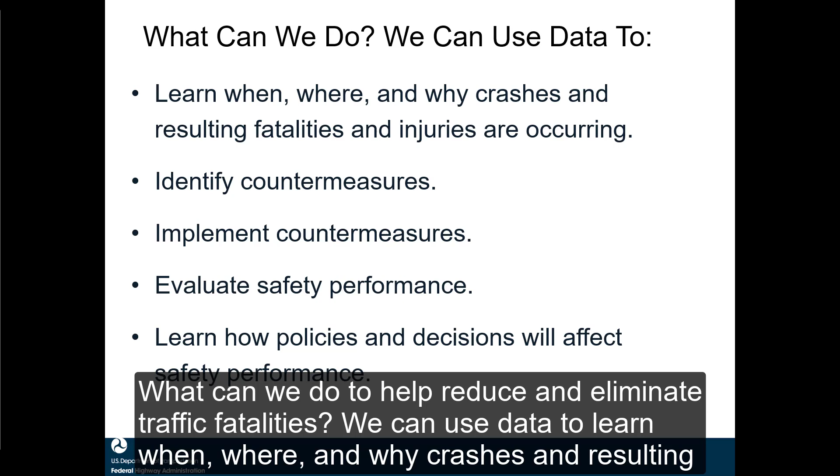What can we do to help reduce and eliminate traffic fatalities? We can use data to learn when, where, and why crashes and resulting fatalities and injuries are occurring, identify countermeasures, implement countermeasures, evaluate safety performance of treatments and roadways, and learn how policies and decisions will affect safety performance.

Data-driven safety analysis, or DDSA, is a method of analysis that uses tools to analyze crash and roadway data to predict the safety impacts of highway projects, allows agencies to target investments with more confidence and reduce severe crashes on the roadways. There are two approaches to DDSA: predictive analysis and systemic analysis.

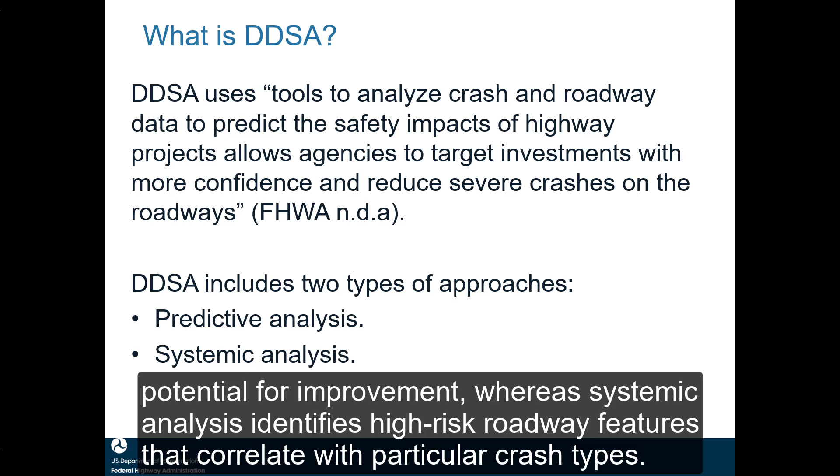Predictive analysis identifies sites with the greatest potential for improvement, whereas systemic analysis identifies high-risk roadway features that correlate with particular crash types. I'm now going to go through an example of using DDSA for a roadway project.

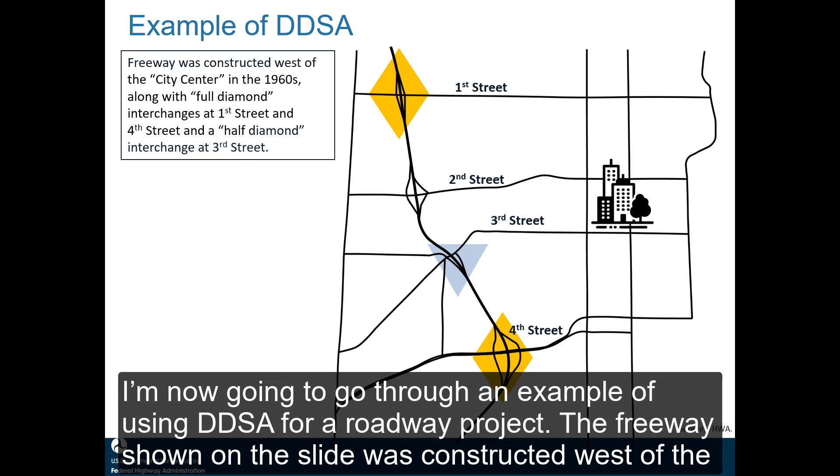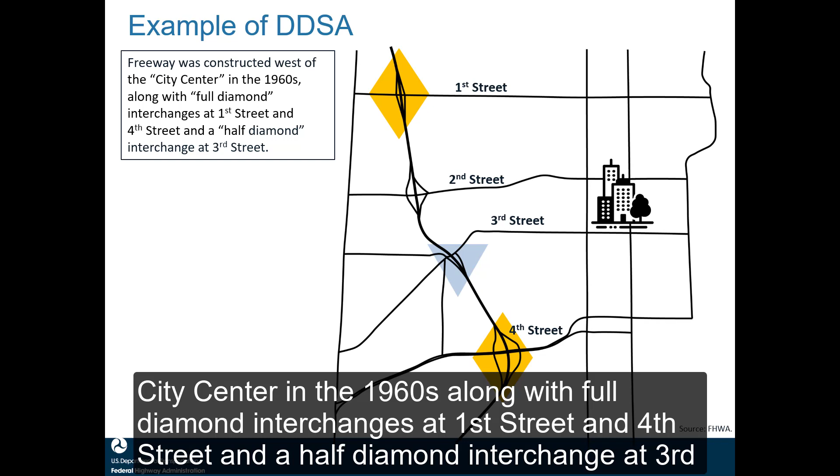The freeway shown on the slide was constructed west of the city center in the 1960s, along with full diamond interchanges at 1st Street and 4th Street, and a half diamond interchange at 3rd Street. Later, in 1977, an additional full diamond interchange was constructed at 2nd Street.

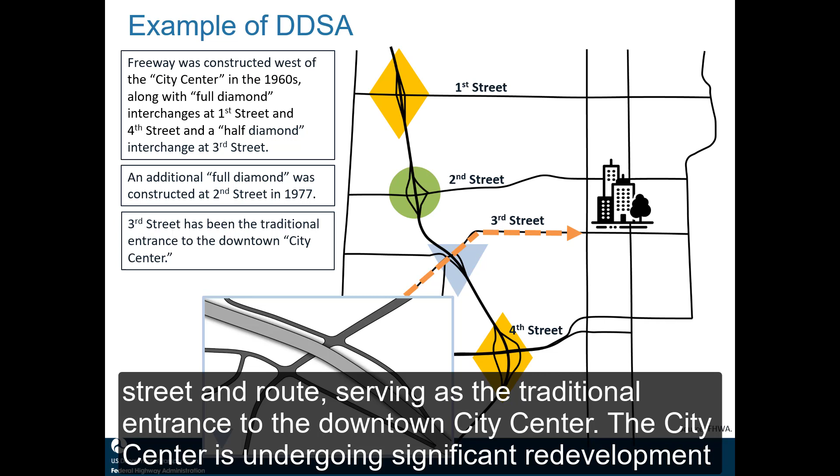3rd Street has been an important street and route serving as the traditional entrance to the downtown city center. The city center is undergoing significant redevelopment efforts.

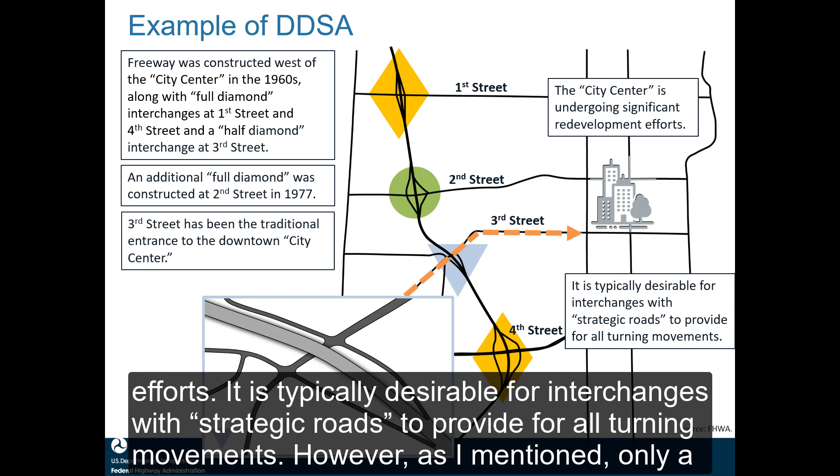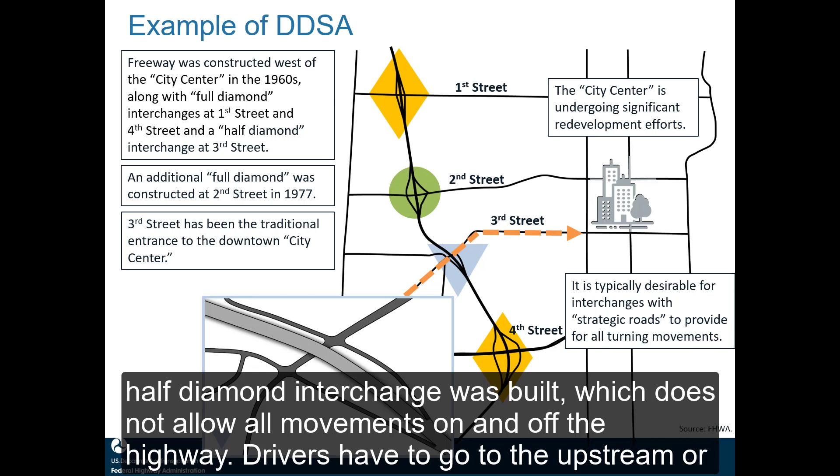It is typically desirable for interchanges with strategic roads to provide for all turning movements. However, as I mentioned, only a half diamond interchange was built, which does not allow all movements on and off the highway. Drivers have to go to the upstream or downstream interchange to make certain movements.

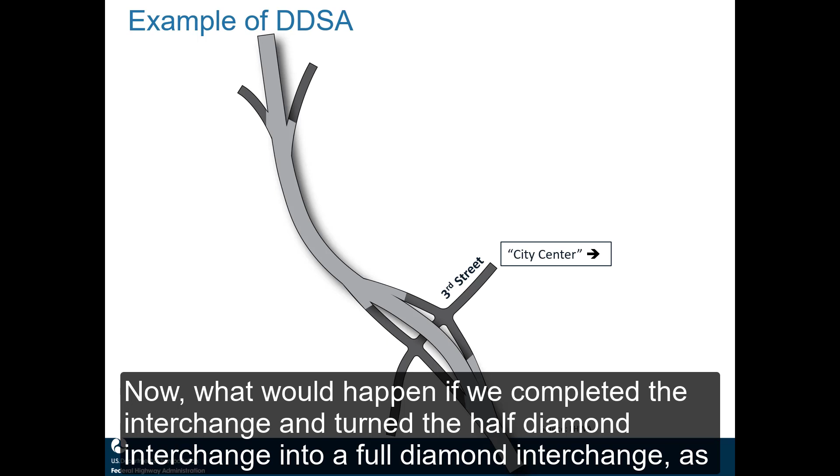Now, what would happen if we completed the interchange and turned the half diamond interchange into a full diamond interchange, as shown on the screen? What are the potential safety issues we need to think about? One safety issue we need to consider is that ramp spacing gets tighter, which could result in more weaving movements.

Before I proceed any further, I want to define a couple of key terms I've used while discussing these examples. The first is interchange spacing, illustrated in the top drawing. This is usually defined from the center line of a cross street with an interchange to the center line of an adjacent cross street with an interchange.

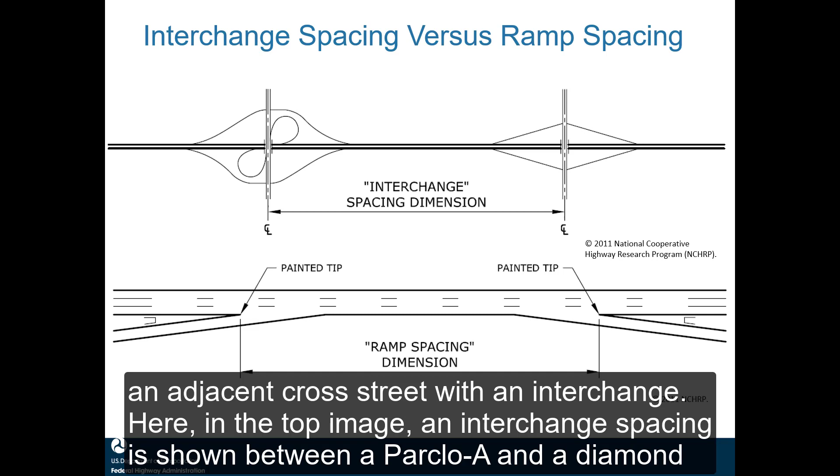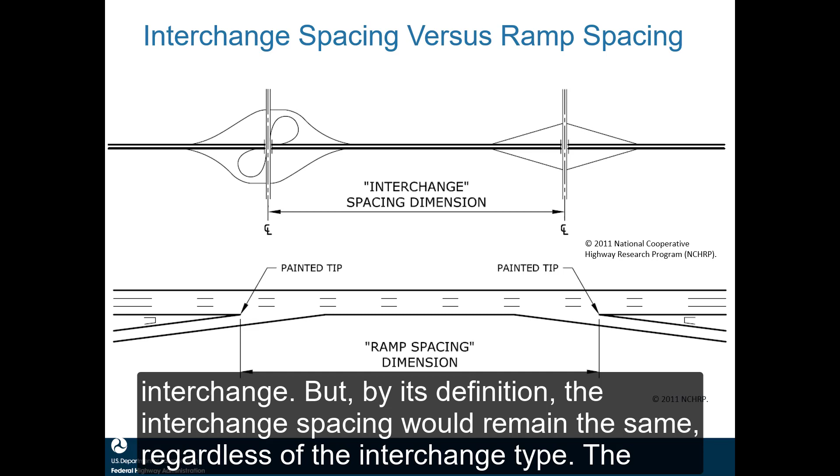Here, in the top image, an interchange spacing is shown between a parclo A and a diamond interchange, but by its definition, the interchange spacing would remain the same regardless of the interchange type. The dimension in the bottom image represents ramp spacing, which I will define during this presentation as the length between the painted tips of two adjacent ramps.

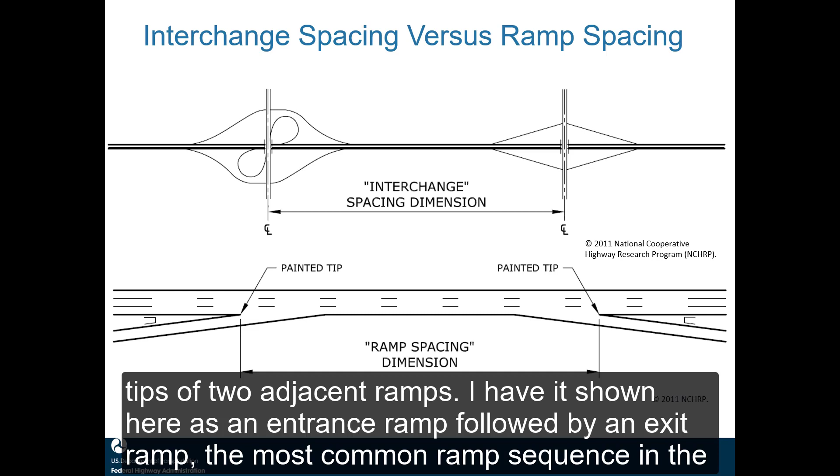I have it shown here as an entrance ramp followed by an exit ramp, the most common ramp sequence in the US. This could also be consecutive entrance ramps or consecutive exit ramps.

This definition has varied. The Green Book, the most widely referenced geometric design policy in the US, has defined ramp spacing as between like points, which could vary quite substantially depending on the like points we choose. The Highway Capacity Manual has offered some different definitions as well.

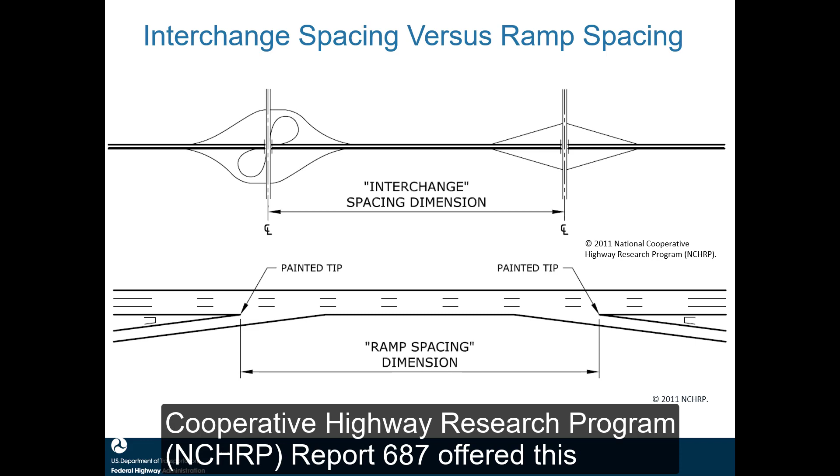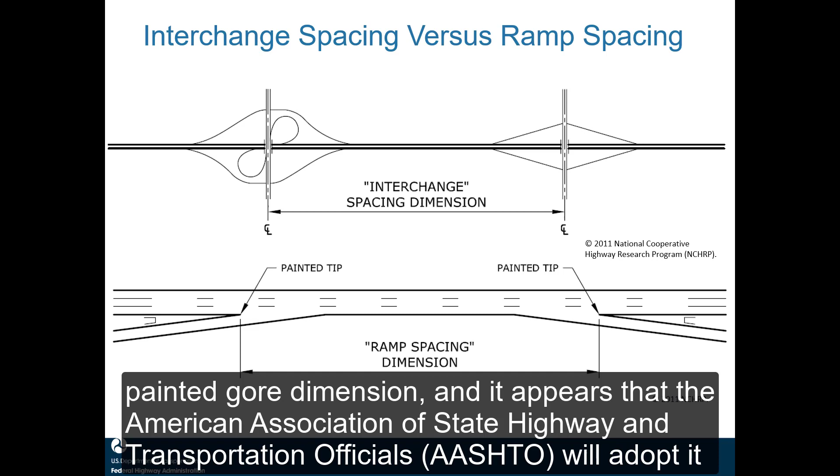National Cooperative Highway Research Program (NCHRP) Report 687 offered this painted gore dimension, and it appears that the American Association of State Highway and Transportation Officials (AASHTO) will adopt it for future editions of its Green Book.

Ramp spacing seems to have more relevant meaning from an operational and safety standpoint, as one interchange spacing can correspond to a range of ramp spacing values, depending on the interchange type.

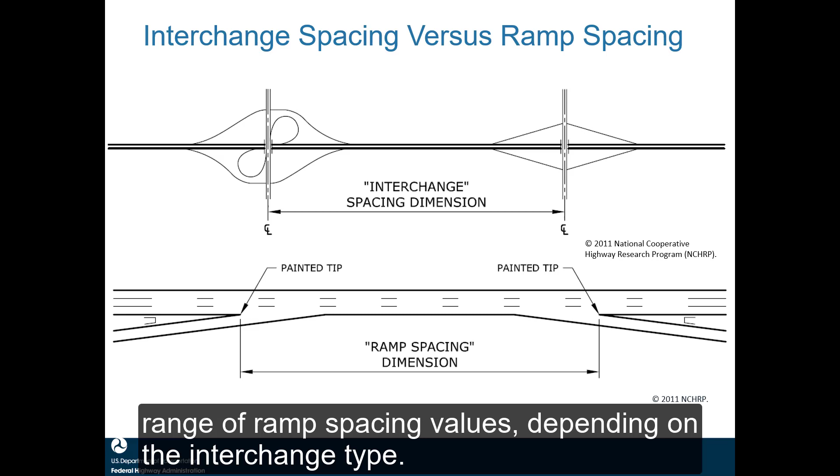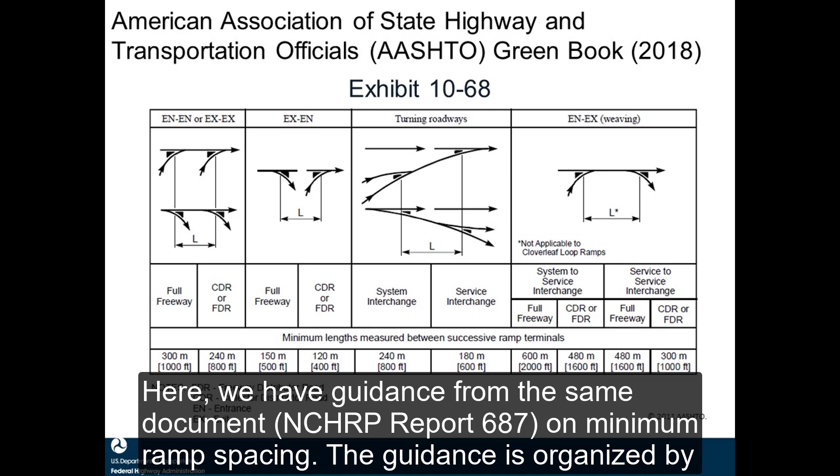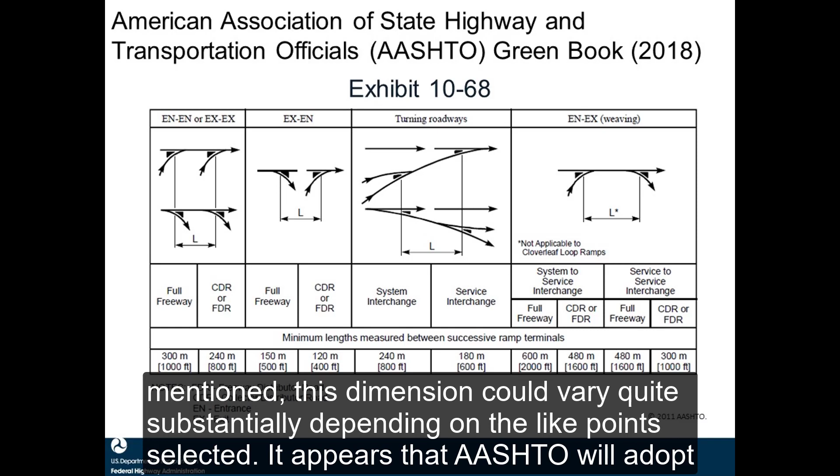These dimensions are shown here to be measured between what appears to be physical gores, but the Green Book suggests that any like points can be used. As I mentioned, this dimension could vary quite substantially depending on the like points selected.

It appears that AASHTO will adopt the painted gore to painted gore dimension that NCHRP Report 687 offered for future editions of its Green Book.

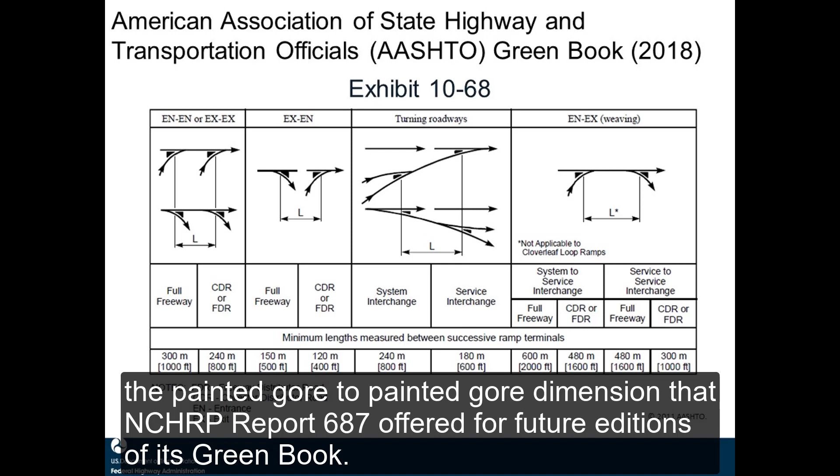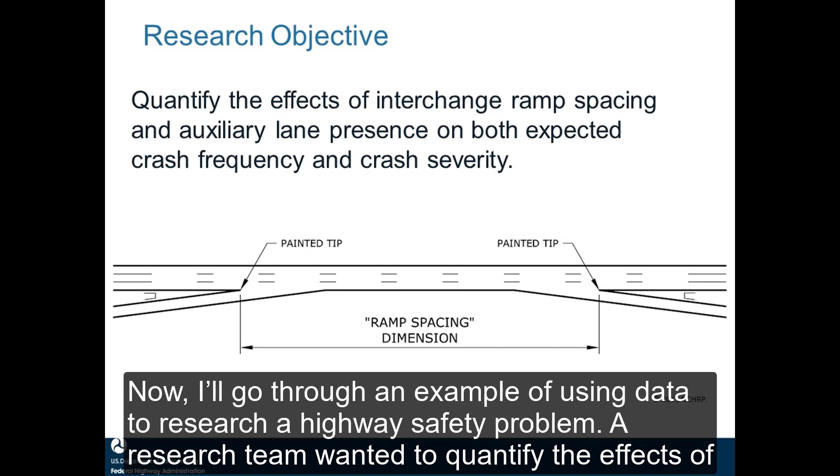Now I'll go through an example of using data to research a highway safety problem. A research team wanted to quantify the effects of interchange ramp spacing and auxiliary lane presence on both expected crash frequency and severity. Defining the segments was the first challenge.

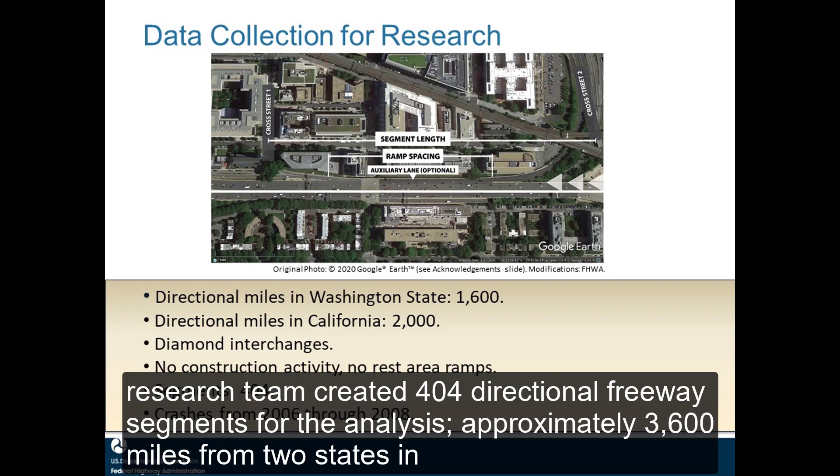Normally, segments are defined to be uniform in terms of their traffic and features. The research team created 404 directional freeway segments for the analysis, approximately 3,600 miles from 2 states in the U.S. These 2 states do not provide a lot of geographic dispersion across the U.S., but they are 2 states with data related to ramp volumes, an important component of the models.

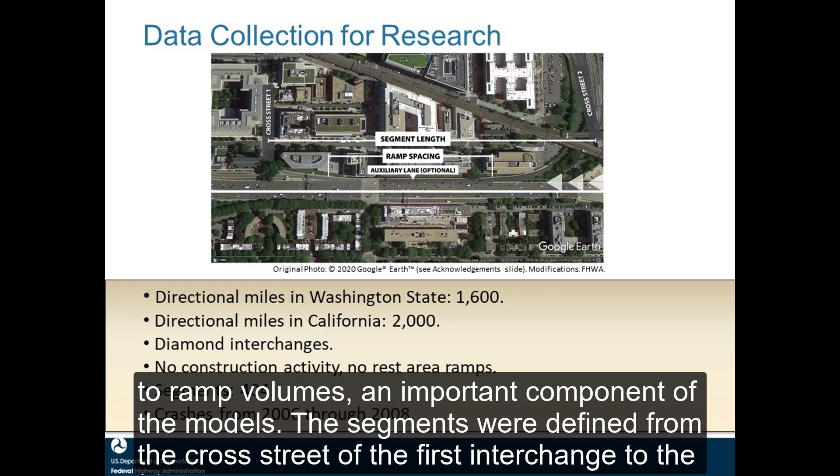The segments were defined from the cross street of the first interchange to the cross street of the next downstream interchange. Ramp spacing was defined from painted tip to painted tip.

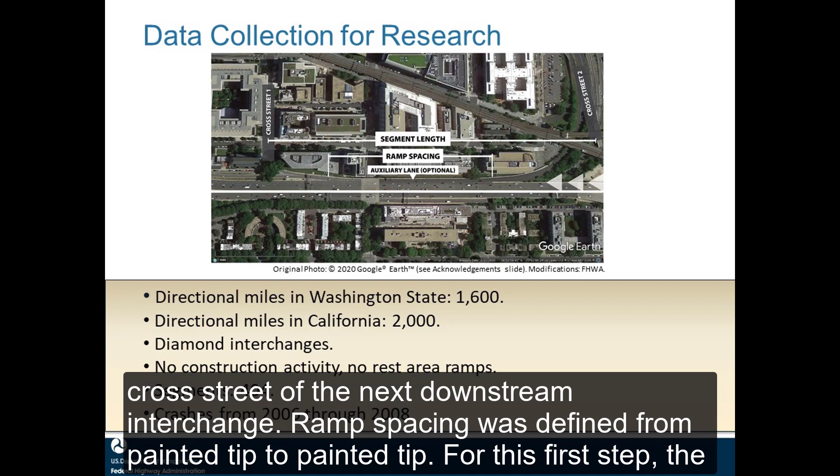For this first step, the research team focused only on segments with diamond interchanges at each end. As such, the research team always had an entrance ramp followed by an exit ramp.

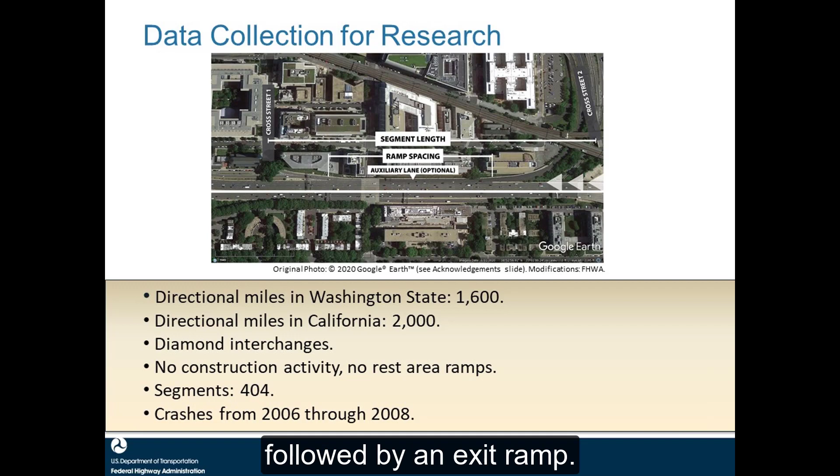Some segments had an auxiliary lane present, intended to improve safety and operations for shorter ramp spacing values. The safety effect of providing an auxiliary lane has not been quantified in the literature.

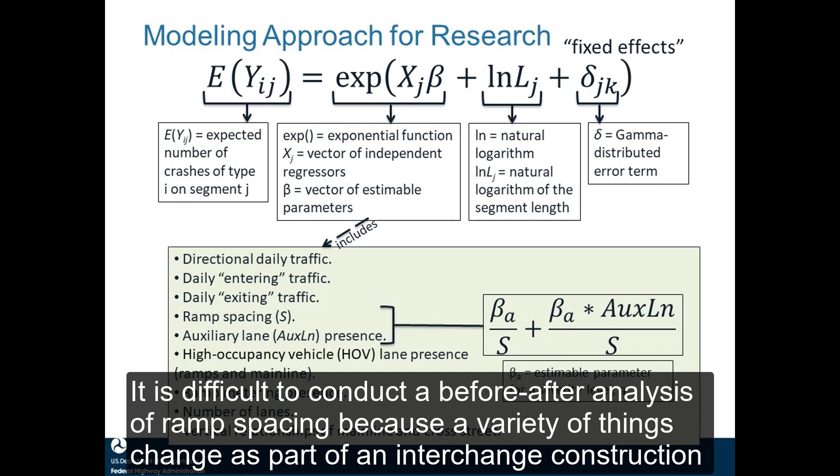The research team used 3 years of crash data to estimate the models. It is difficult to conduct a before-after analysis of ramp spacing because a variety of things change as a part of an interchange construction or reconstruction project.

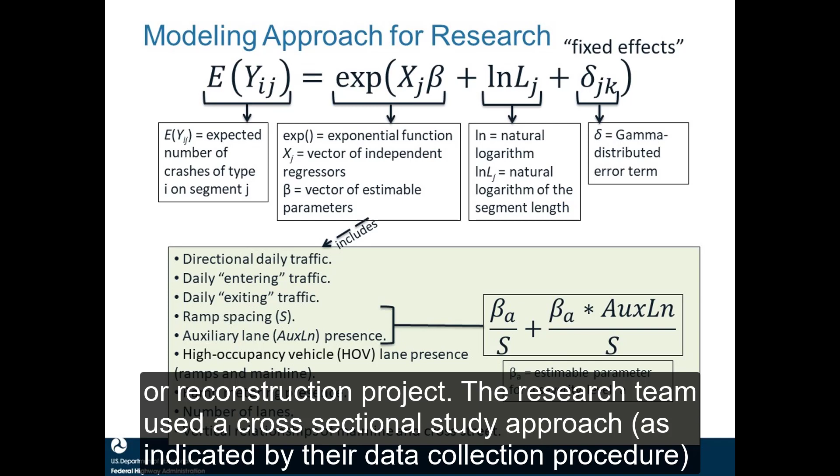The research team used a cross-sectional study approach, as indicated by their data collection procedure, and used negative binomial regression to quantify the relationship between ramp spacing and safety.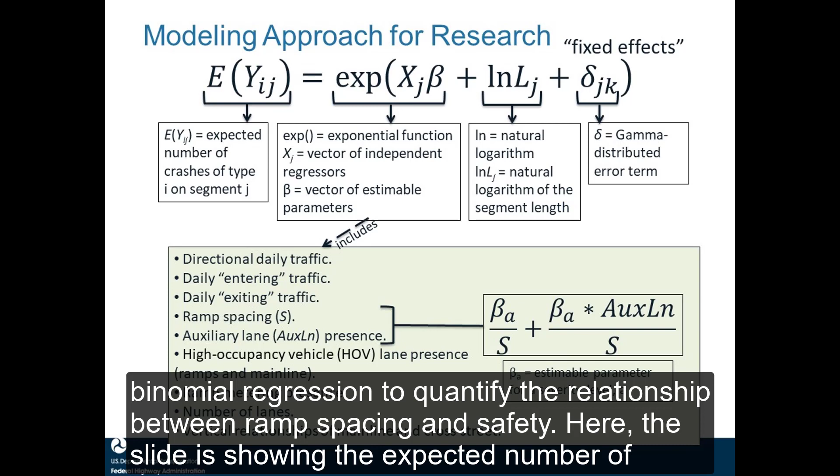Here, the slide is showing the expected number of crashes, possibly all crashes, or by type and severity, as a function of a number of traffic and geometric variables and the natural logarithm of segment length, which is included with the parameter set to 1, as shown here.

The covariates include directional traffic on the main line, entering and exiting traffic, ramp spacing, the presence of an auxiliary lane between entrance and exit ramps, the presence of ramp metering, presence of HOV lanes on the ramp and main line, the number of through lanes, and the vertical relationship between the cross street and freeway.

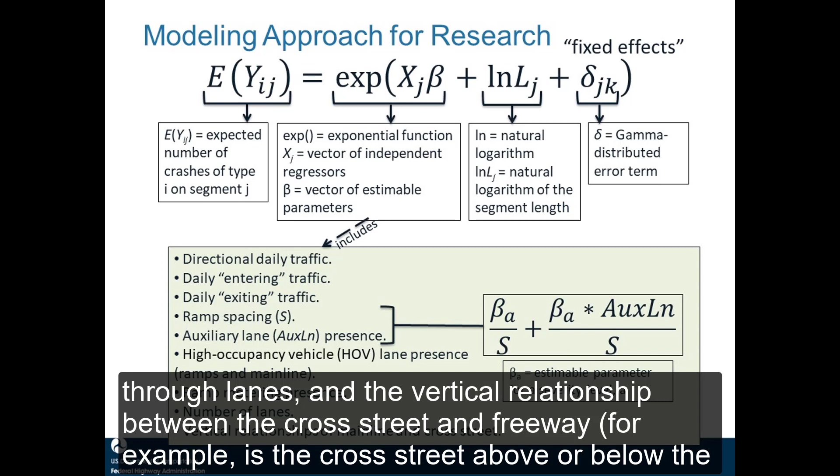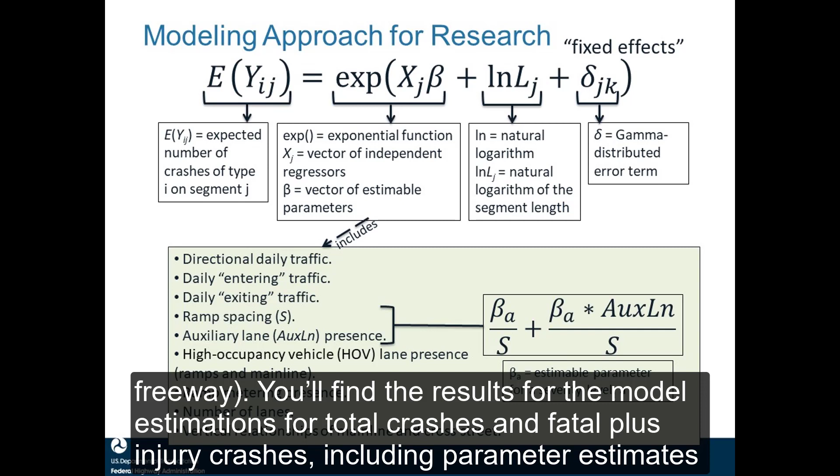For example, is the cross street above or below the freeway? You'll find the results for the model estimations for total crashes and fatal plus injury crashes, including parameter estimates and standard errors, in the research paper.

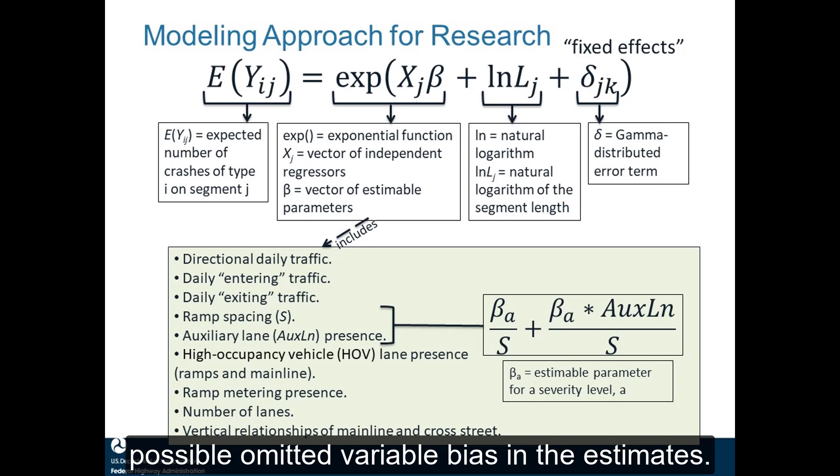The research team kept the model specifications general to try and minimize possible omitted variable bias in the estimates. Let me make one caveat here.

If you think back a few slides, we are defining our segments from cross street to cross street. This means that some of the features may change along the segment. The variables that are currently on the right-hand side of the models are those that do not change.

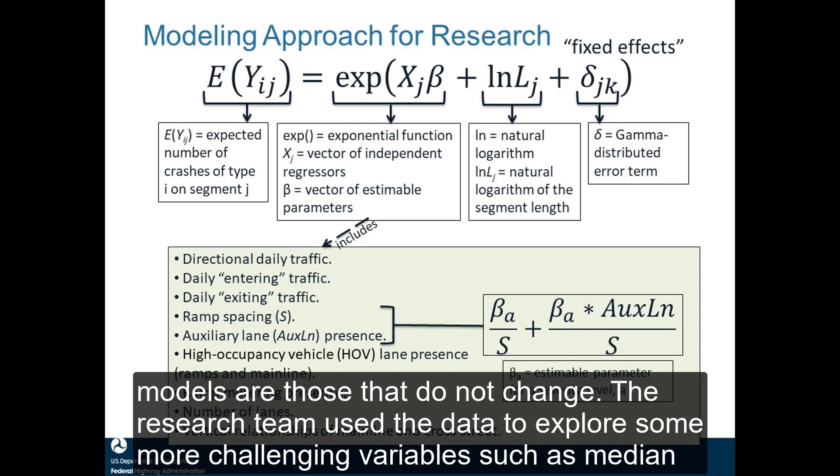The research team used the data to explore some more challenging variables such as median type and width, which may change one or more times throughout the segment. The research team tried a variable called percent of segment with median barrier.

It did not affect the ramp spacing parameter estimates, but once they added median characteristics to the model, they reasoned their level of confidence would increase another step.

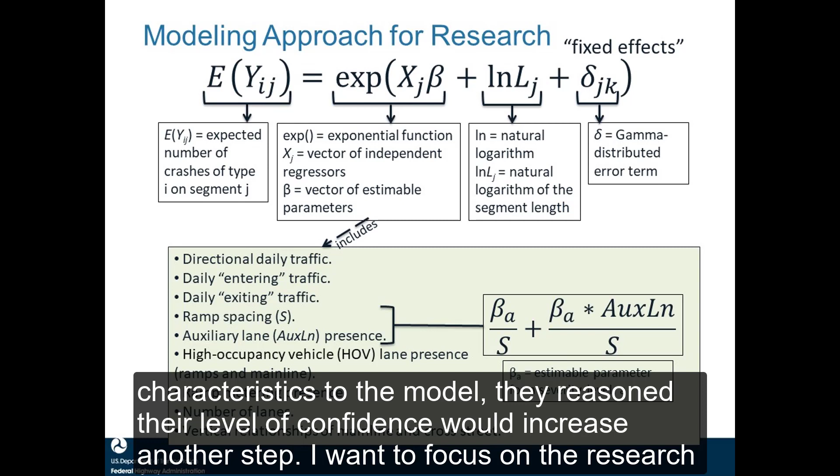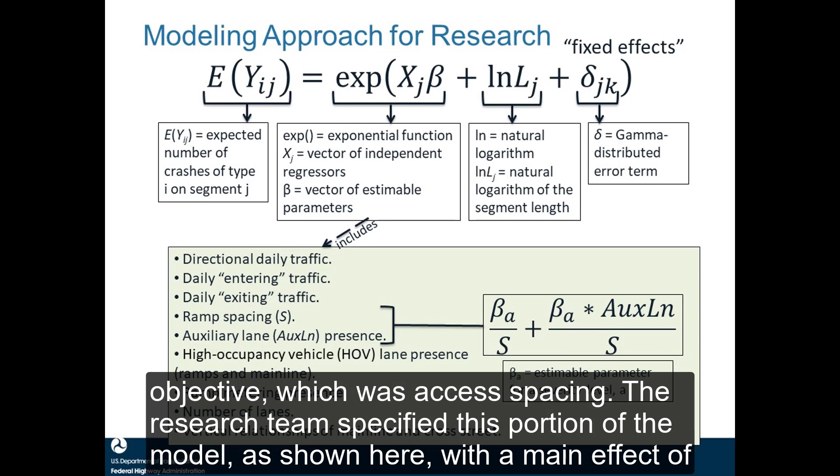I want to focus on the research objective, which was access spacing. The research team specified this portion of the model, as shown here, with a main effect of spacing, then an interaction effect of auxiliary lane presence with spacing.

I'll try to present these specific results in the form of crash modification factors. This is the ratio of expected crash frequencies under two different conditions. Oftentimes, condition A is referred to as the base condition, and condition B is some deviation from the base condition.

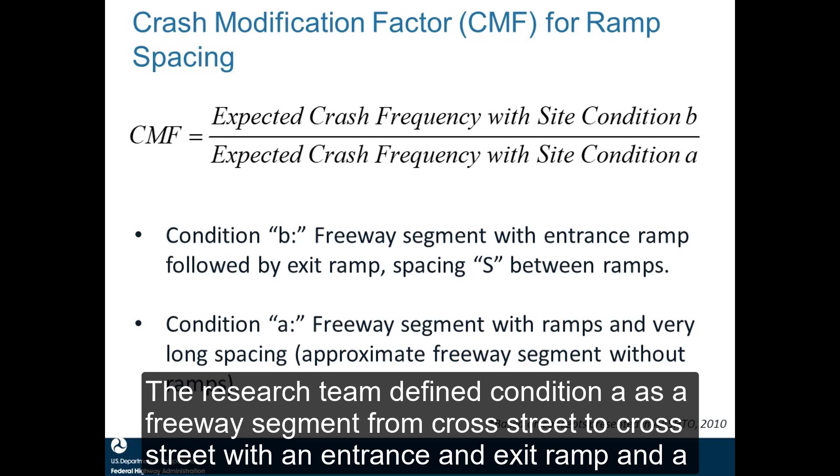The research team defined condition A as a freeway segment from cross street to cross street with an entrance and exit ramp and a very long spacing. Essentially, the CMF will approach 1 as the spacing approaches infinity. You can think of the base condition as a typical freeway segment, but the CMF never quite hits 1 because we always have the entrance and exit ramp location, where crashes tend to be a little higher than if there were no ramps. Here are the results for total crashes.

The parameter estimates for the rest of the variables are found in the paper, but with limited time, I wanted to focus on ramp spacing. We can now compare any two spacing values from a safety standpoint.

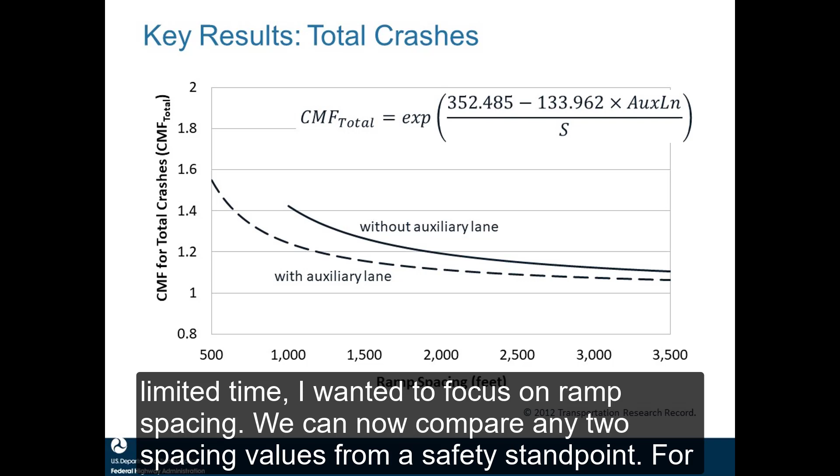For example, we have a CMF of approximately 1.1 at a spacing of 3,000 feet and no auxiliary lane, and a CMF of approximately 1.3 at a spacing of 1,500 feet and no auxiliary lane. So, we expect 1.3 divided by 1.1 equals 1.12, or 12% more crashes with a spacing of 1,500 feet compared to a spacing of 3,000 feet.

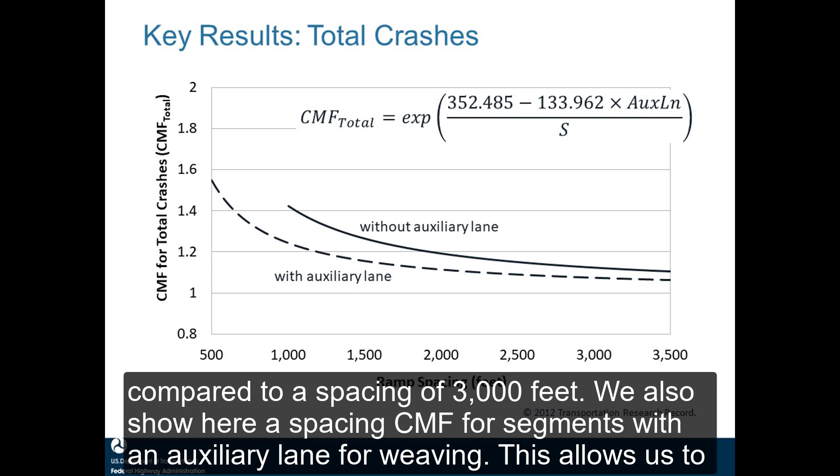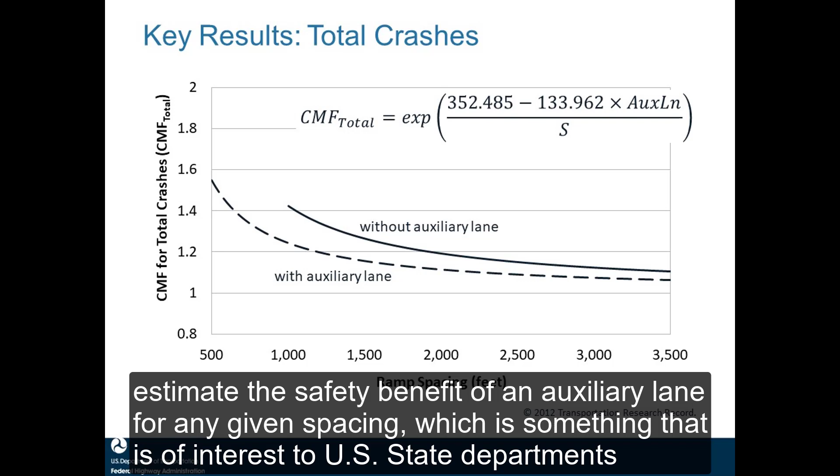We also show here a spacing CMF for segments with an auxiliary lane for weaving. This allows us to estimate the safety benefit of an auxiliary lane for any given spacing, which is something that is of interest to U.S. State Departments of Transportation, DOTs.

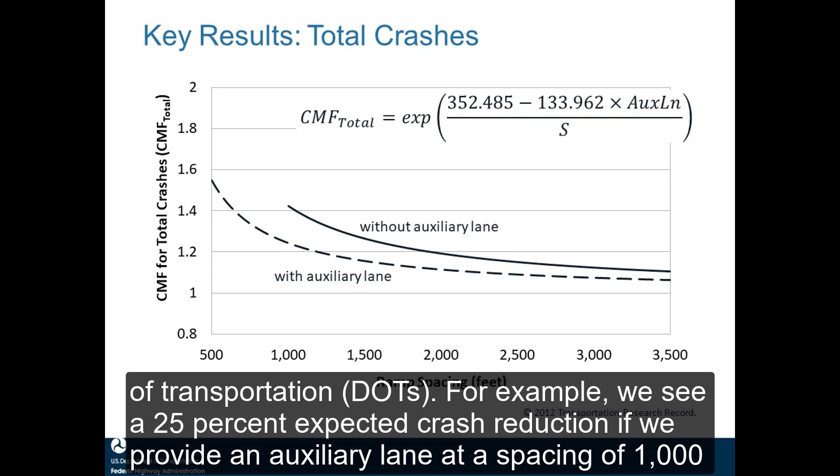For example, we see a 25% expected crash reduction if we provide an auxiliary lane at a spacing of 1,000 feet. This safety benefit diminishes as the spacing gets longer, as one would expect. For example, we see an expected 9% reduction at a spacing of 2,500 feet.

I'll also quickly show the results for fatal plus injury crashes. The trends are similar; however, the sensitivity is a little less than for total crashes. In other words, the proportion of total crashes resulting in a fatality or injury is decreasing as spacing decreases.

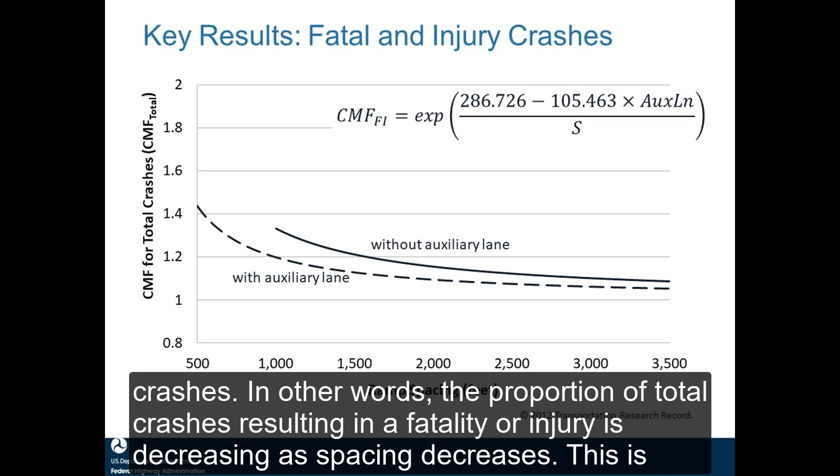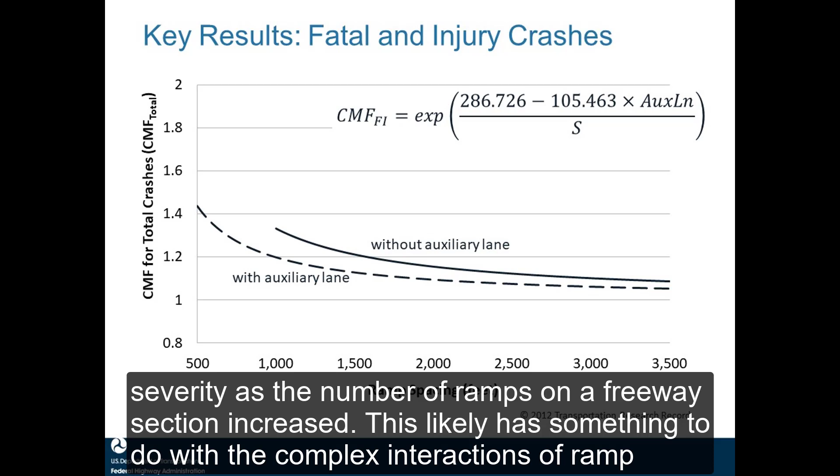This is consistent with some previous work by John Milton, Venki Shankar, and Fred Mannering that seemed to show a reduction in crash severity as the number of ramps on a freeway section increased. This likely has something to do with the complex interactions of ramp spacing, operations and speed, and safety.

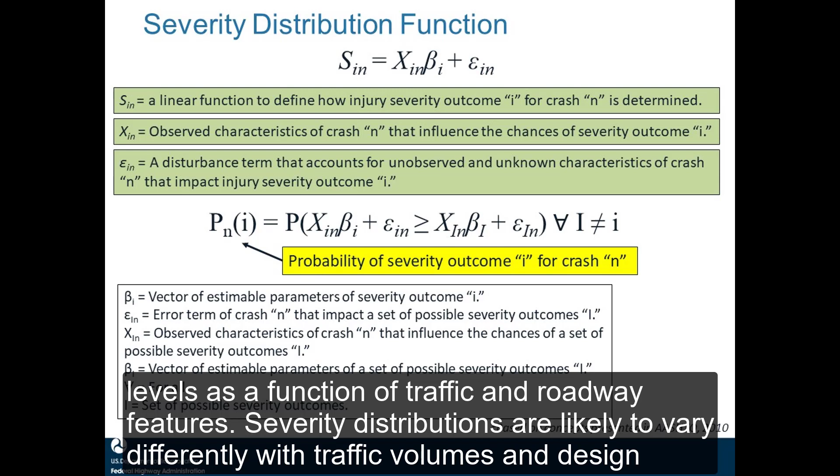After developing the models, the research team can then develop severity distribution functions to predict proportions of different crash severity levels as a function of traffic and roadway features. Severity distributions are likely to vary differently with traffic volumes and design decisions depending on the crash type of interest.

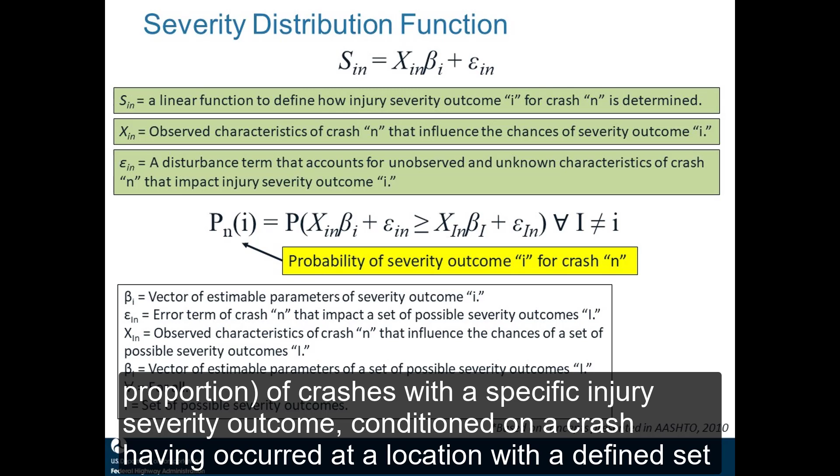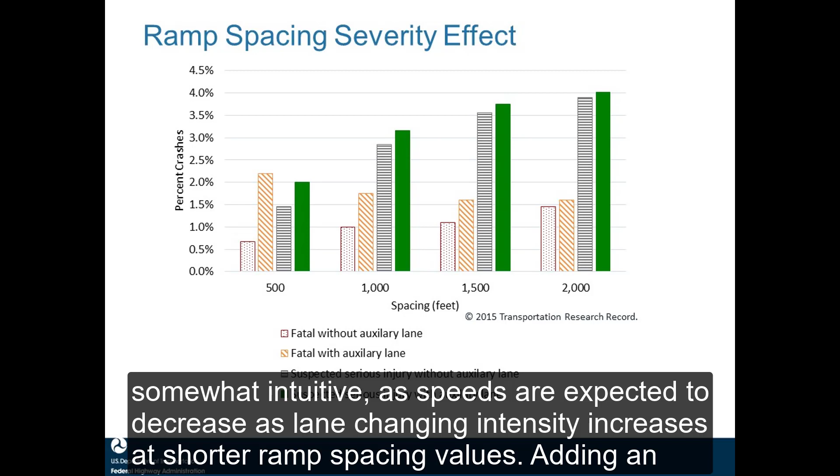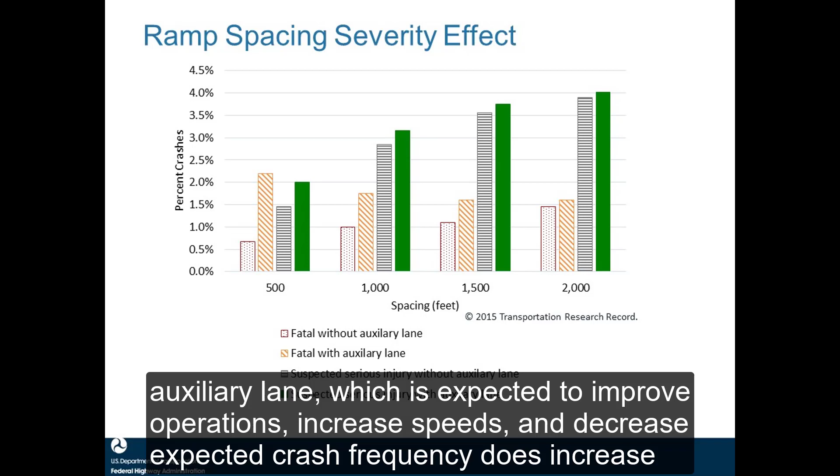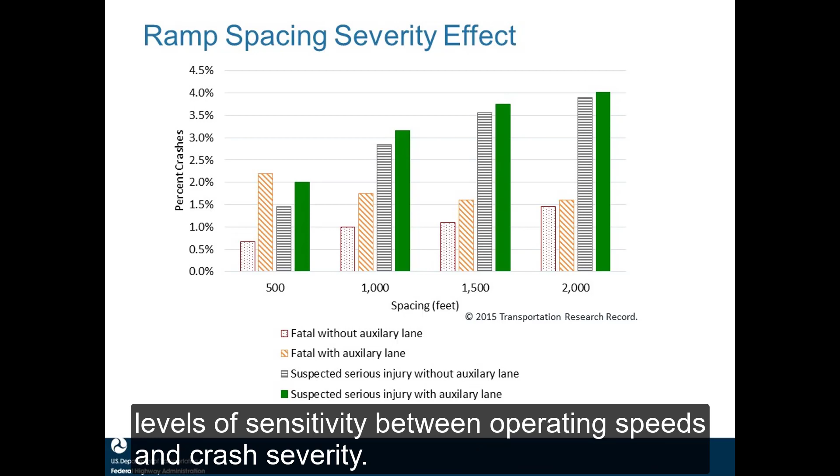The findings are somewhat intuitive, as speeds are expected to decrease as lane changing intensity increases at shorter ramp spacing values. Adding an auxiliary lane, which is expected to improve operations, increase speeds, and decrease expected crash frequency, does increase overall crash severity, as measured by the proportions of severe crash outcomes. Again, this finding is not surprising given the high levels of sensitivity between operating speeds and crash severity.

We can use the data and analysis to calculate the annual crash cost change for different ramp spacings and whether an auxiliary lane is present. The National Safety Council, NSC, calculates costs of motor vehicle injuries as the combined wage and productivity loss, medical expense, administrative expense, motor vehicle damage, and employers' uninsured costs.

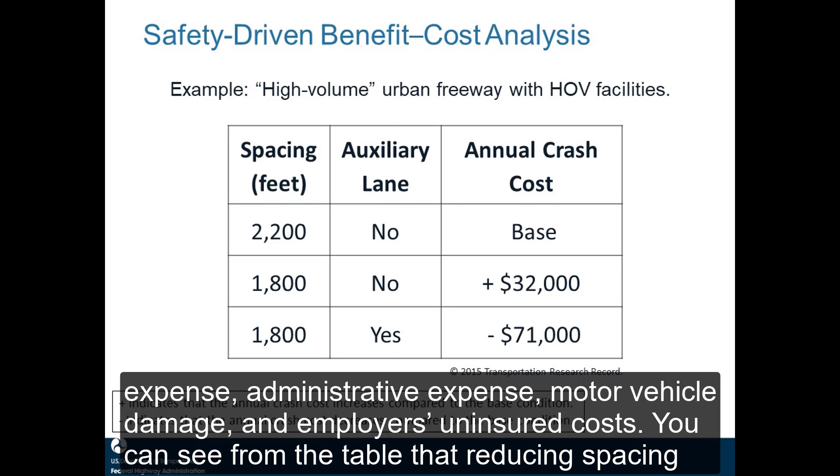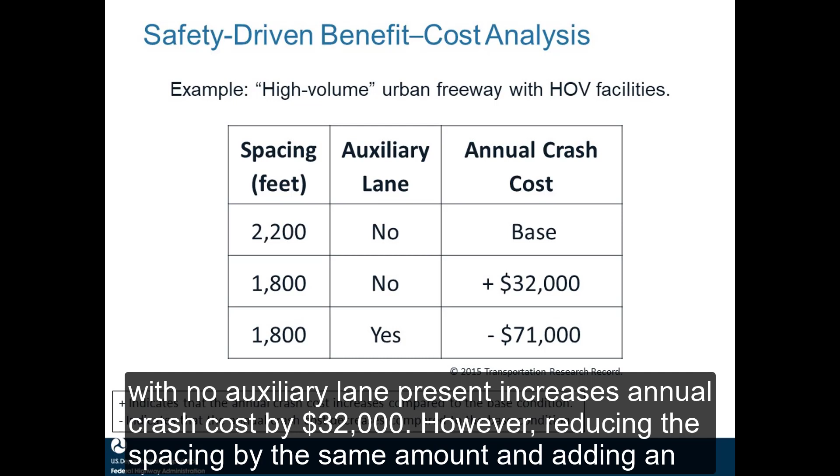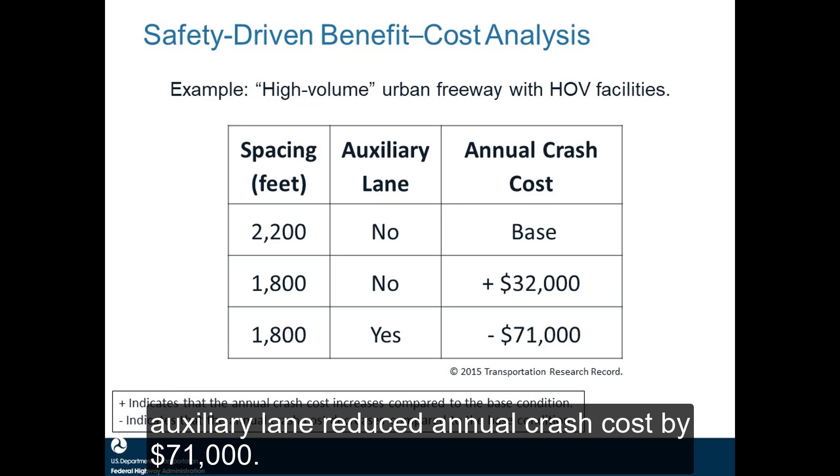You can see from the table that reducing spacing with no auxiliary lane present increases annual crash cost by $32,000. However, reducing the spacing by the same amount and adding an auxiliary lane reduced annual crash cost by $71,000. Safety is defined as the number of accidents or accident consequences by kind and severity expected to occur on the entity during a specified period.

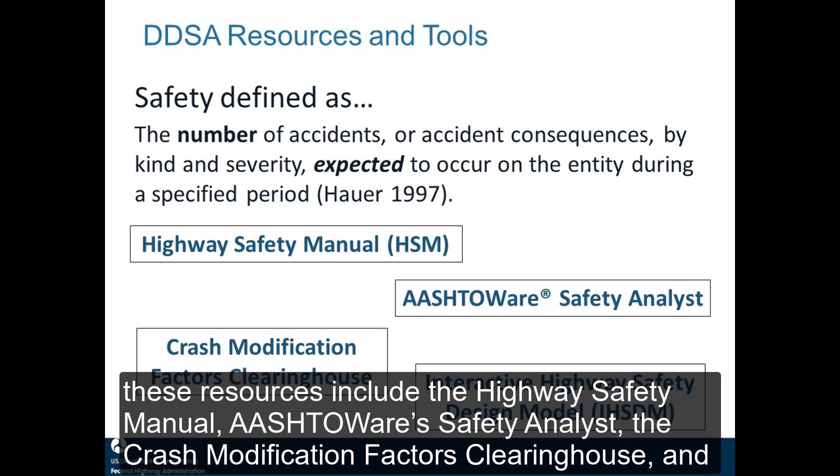There are many tools and resources available to analyze safety and perform a data-driven safety analysis. Some of these resources include the Highway Safety Manual, AASHTOware's Safety Analyst, the Crash Modification Factors Clearinghouse, and the Interactive Highway Safety Design Model.

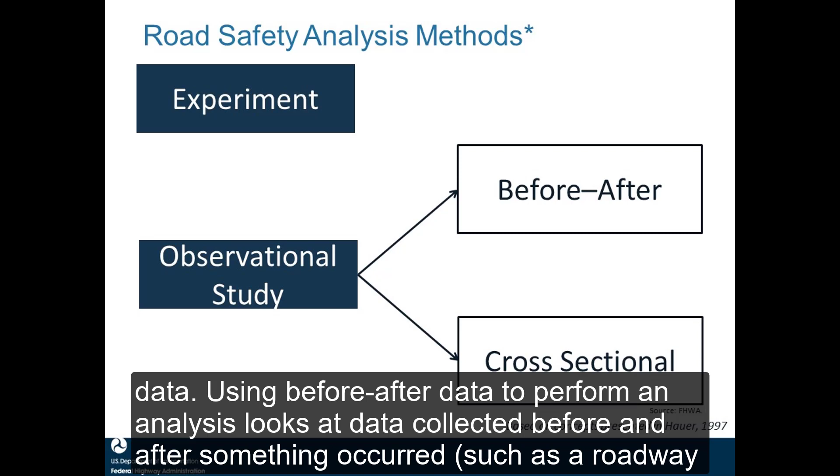Two different types of road safety analysis methods exist: an experimental study and an observational study. An experimental study is where the researcher controls and manipulates the conditions, whereas an observational study uses either before-after data or cross-sectional data. Using before-after data to perform an analysis looks at data collected before and after something occurred, such as a roadway treatment or countermeasure was installed, to compare the safety effects.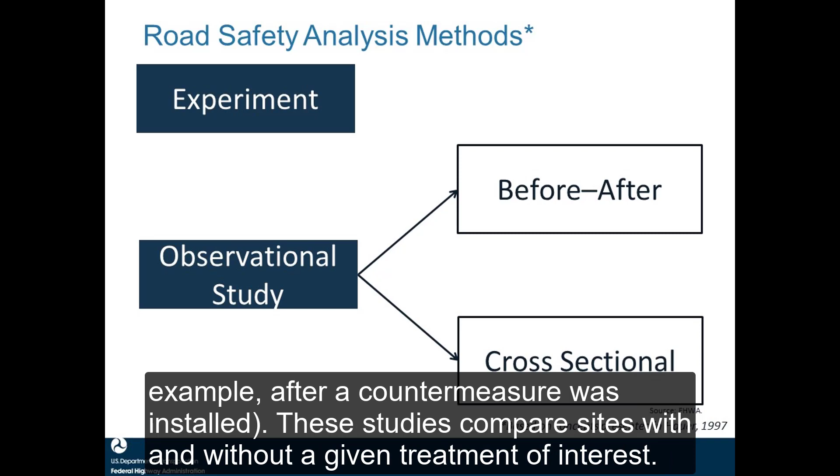Cross-sectional studies only use data in the after period, for example, after a countermeasure was installed. These studies compare sites with and without a given treatment of interest. Here are two examples of before-after studies.

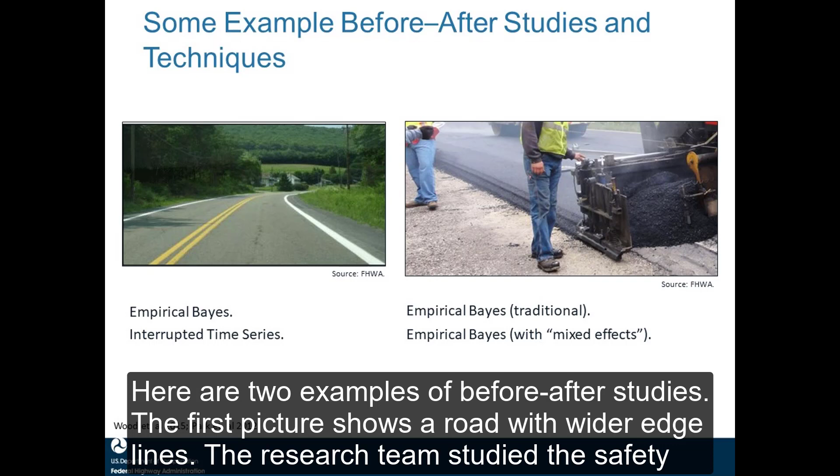The first picture shows a road with wider edge lines. The research team studied the safety effects of wider edge lines on rural two-lane highways by analyzing crash frequency data.

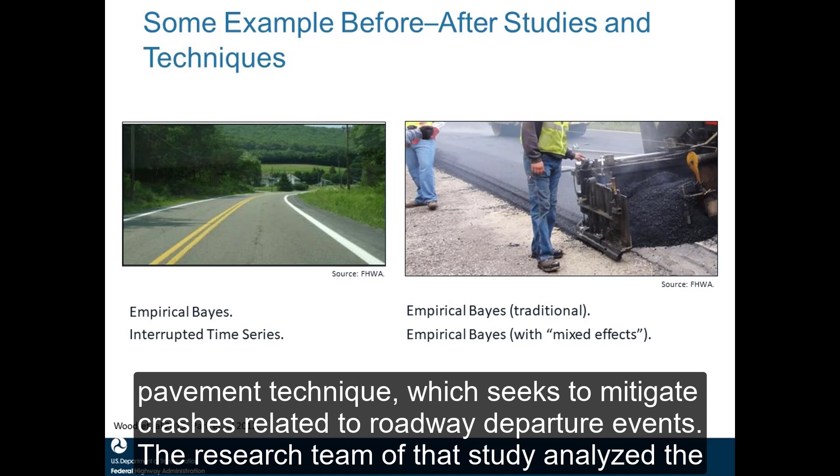The second picture displays the safety edge pavement technique, which seeks to mitigate crashes related to roadway departure events. The research team of that study analyzed the safety effects of the safety edge treatment using a before-after study.

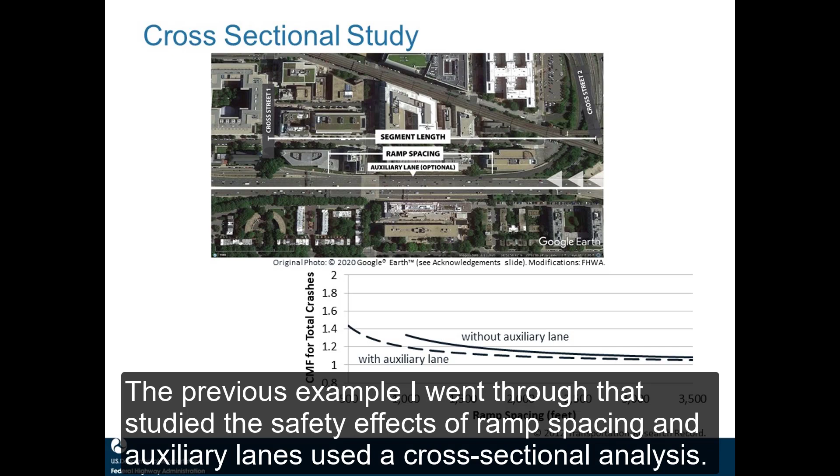The previous example I went through, which studied the safety effects of ramp spacing and auxiliary lanes, used a cross-sectional analysis. This study compared the safety of ramps with different spacings and presence of auxiliary lanes.

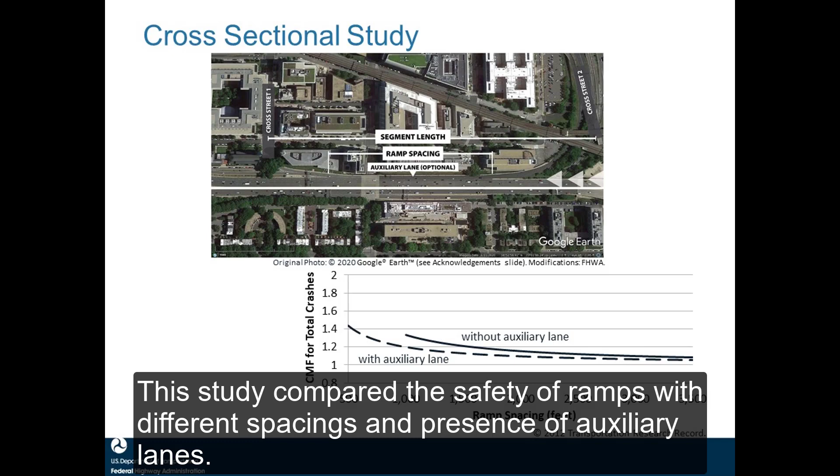Now that you have an idea of how data can be used to analyze the safety impacts of different treatments and geometric conditions, I'm going to describe one data source that can be used to research different safety problems: the Highway Safety Information System, or HSIS.

HSIS is a roadway-based system that provides quality data on a large number of accident, roadway, and traffic variables. Currently, 7 states and 1 city offer data to HSIS and are available to researchers.

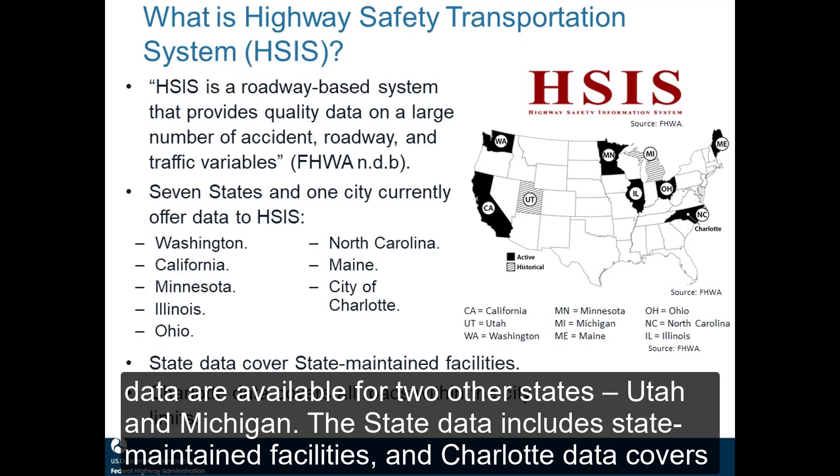They include Washington, California, Minnesota, Illinois, Ohio, North Carolina, Maine, and the city of Charlotte. As you can see on the map, historical or older data are available for 2 other states, Utah and Michigan. The state data includes state-maintained facilities, and Charlotte data covers all roads within the city limits.

Using HSIS data has many advantages over using roadway and crash data from other sources. HSIS gives you the ability to analyze multiple states together with common variables. Crashes can be easily combined with traffic, infrastructure, and related assets.

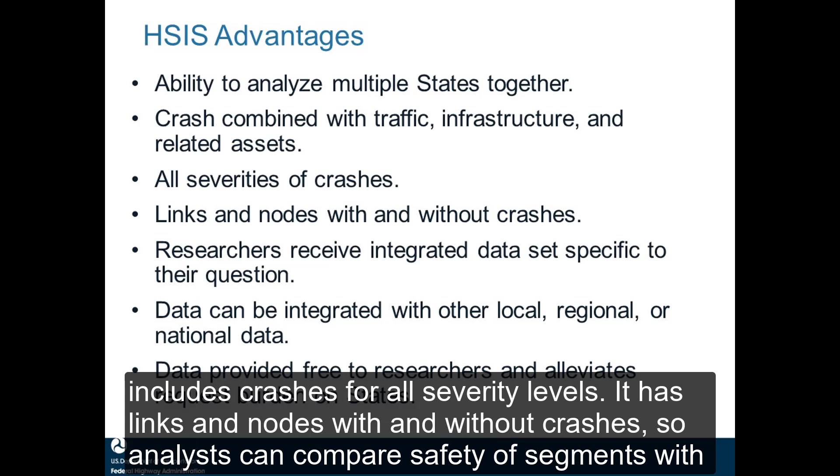HSIS includes crashes for all severity levels. It has links and nodes with and without crashes, so analysts can compare safety of segments with and without crashes. When data are requested, researchers receive an integrated data set specific to their research questions.

HSIS data can be integrated with other local, regional, or national data. One last big advantage of HSIS is that the data are provided free to researchers and alleviates the request burden on states. HSIS data have been used to analyze many infrastructure and safety countermeasures.

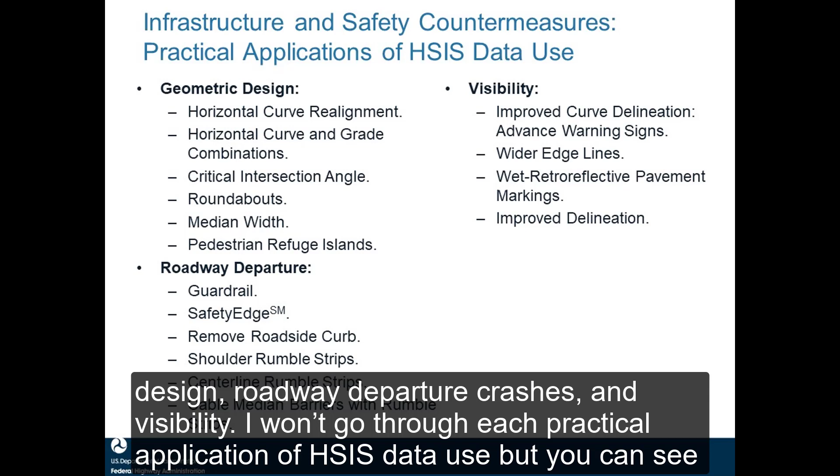Some practical applications relate to geometric design, roadway departure crashes, and visibility. I won't go through each practical application of HSIS data use, but you can see that HSIS data have been used in many data analyses for real-world treatments.

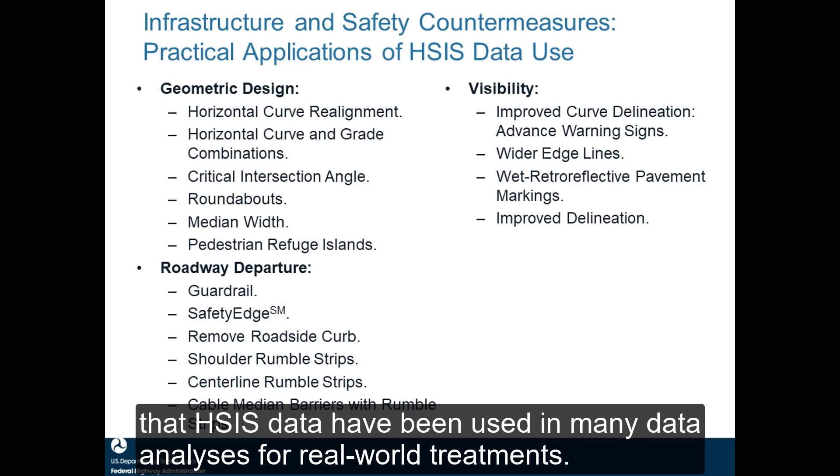Where does HSIS data fit in with other data sources? As I previously mentioned, HSIS includes data from states and 1 city. Other types of data are available at the national, regional, and municipal levels, as well as data from other third parties. HSIS data can be merged with other data sources.

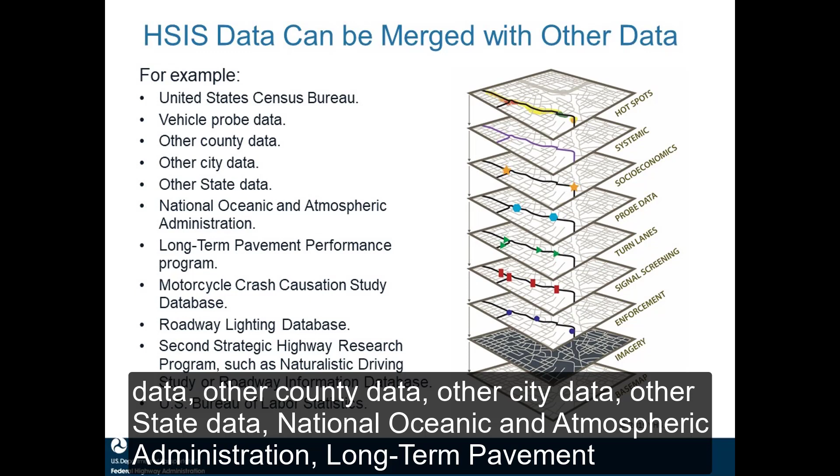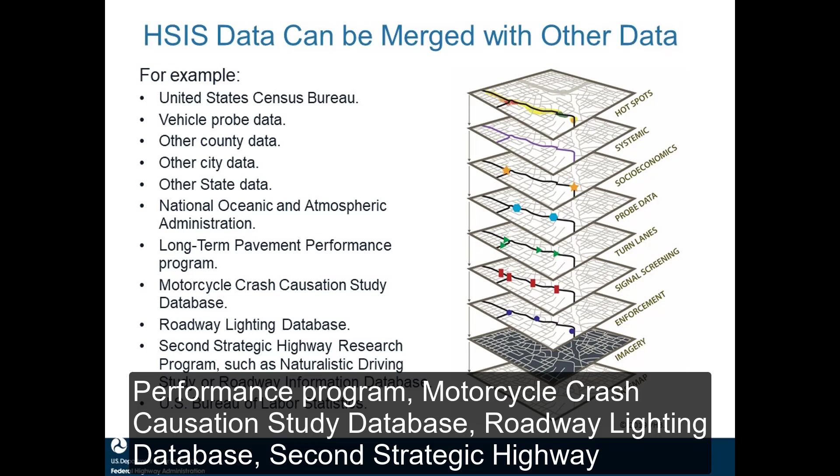Some other data sources include the United States Census Bureau, vehicle probe data, other county data, other city data, other state data, National Oceanic and Atmospheric Administration, Long-Term Pavement Performance Program, Motorcycle Crash Causation Study Database, Roadway Lighting Database, Second Strategic Highway Research Program such as Naturalistic Driving Study or Roadway Information Database, and data from the U.S. Bureau of Labor Statistics.

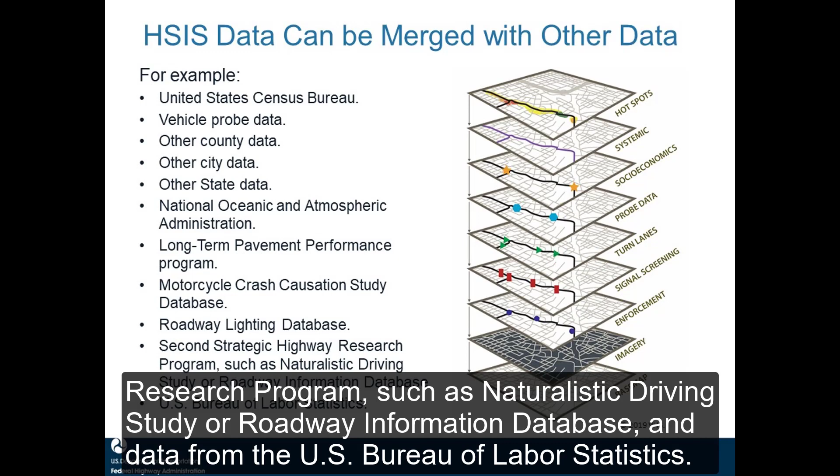After hearing about crash statistics, highway safety research, and HSIS data, now, what can students do to be a part of safety research?

Students can get involved with highway safety research through participating in the HSIS Excellence in Highway Safety Data Award Student Research Paper Competition. The competition involves submitting a research paper that uses HSIS data to investigate a topic or problem that advances highway safety. Students should develop a research question, analyze the question using HSIS data, or HSIS data and other data sources.

Write a research paper based on the analysis and results. Winning papers will receive recognition and award at a ceremony, and the first place winning paper will be published in an international journal. Winning papers will also receive cash prizes and support to attend an international transportation meeting.

Participating in the competition will help you gain real-world experience with a safety data set that could potentially help make data-driven decisions. The competition is open to undergraduate and graduate students in degree-granting programs that support highway safety. These programs include, but are not limited to, engineering, planning, statistics, psychology, and economics.